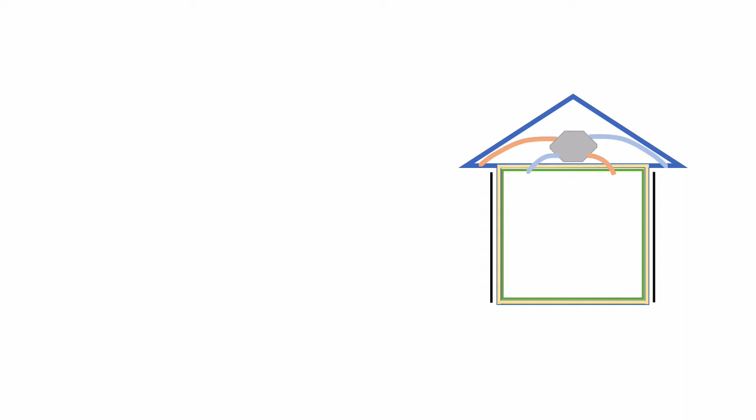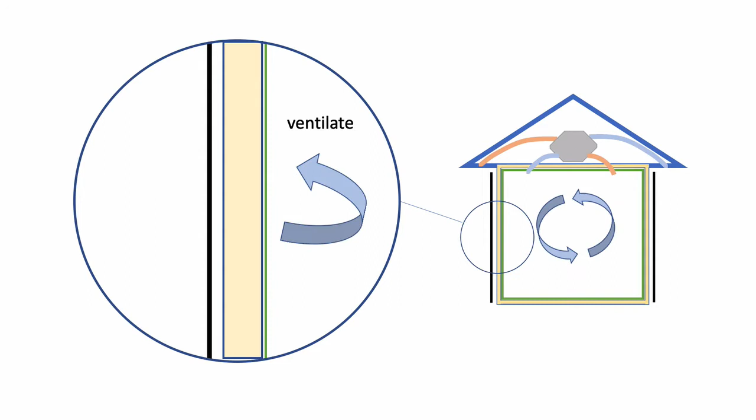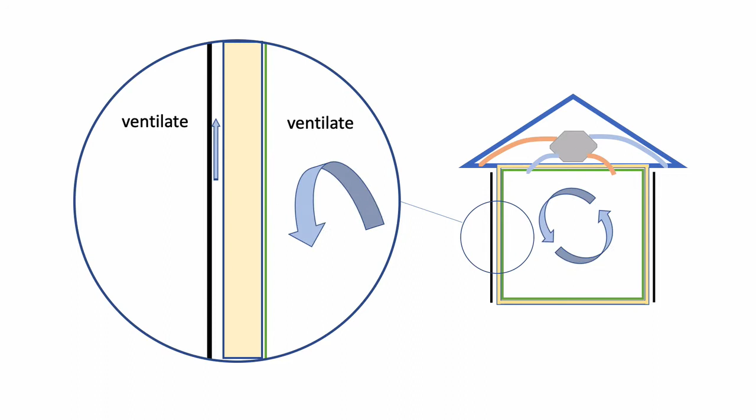So we need to add ventilation. And we add ventilation inside the building through a ventilation system. So that's the inside, but we also ventilate the outside in this small space between our insulation layer and our cladding. And our cladding is really there just as the first line of defense for weather, rain, wind, that sort of thing. And we can never guarantee that that space is going to stay completely dry. So it's a good idea to ventilate and also allow drainage in that space.

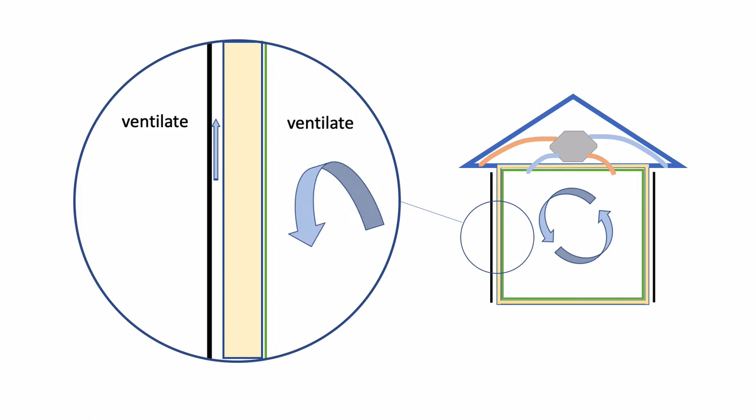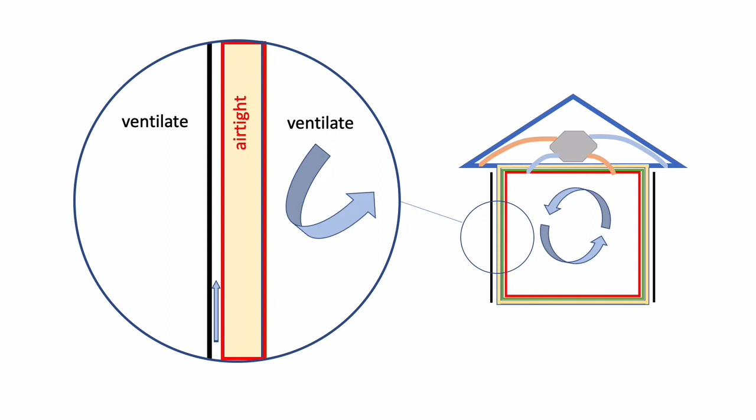So we have ventilation and air movement on both sides of this small space in our wall. And it's really just that space that we actually want to keep airtight. Now, by virtue of doing that around the walls and the roof and the floor, we in fact have an airtight space in which we live. But it's not fully enclosed or without a fresh air supply, as we've discussed, because we're drawing in fresh air from the outside.

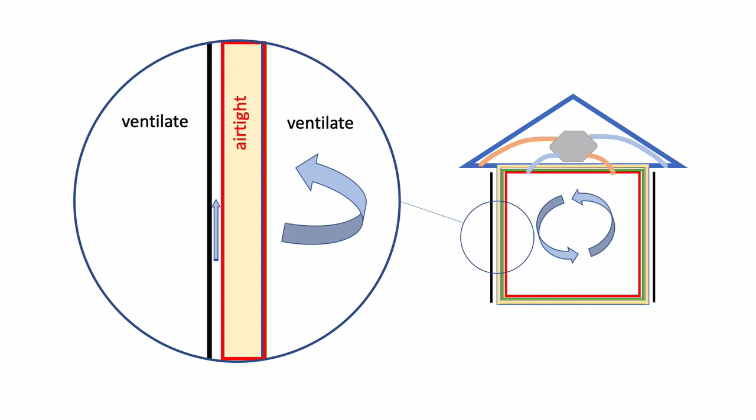And that is how we create an efficient, healthy, and resilient building that we can live in very comfortably and is not going to cause any damage to the structure of the building. So our building needs to be insulated, it needs to be airtight, and it needs to be ventilated. And then we have a good, healthy building.